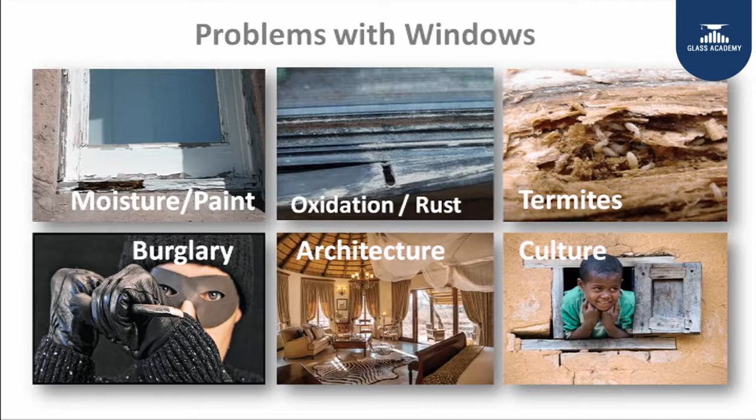Now, when you are connected with the outside, there are certain functional behaviors of windows to be looked at, and of course we also need to understand certain issues related to windows. I am sure you are all aware about the windows in your homes and the problems associated with that. So what are the typical problems, whether it is wood windows, steel windows, or aluminum windows? The simplest is you have to paint it, there are termite issues, there is oxidation, there is rusting, and sometimes beyond these you also have dust ingress, water ingress, noise ingress into the system.

So let us look back and see what windows do for us. If you open up the window, probably you get fresh air. Of course you do not have fresh air anymore in the ambience, but still you are allowed to have that. It gives an aesthetic to the house. It is one of the signature styles used by many architects.

And beyond these three functional requirements, nowadays there are three more critical performance parameters added to windows. The first is energy saving. If you are aware about energy saving, appliances now have a rating from the Bureau of Energy Efficiency as a star rating. A similar concept in windows is also coming in, wherein you have a performance rating.

Other than this, you have low maintenance. You do not want your windows to be repainted every 2 or 3 years. You do not want to replace the glass or the gasket or the performance of the windows. And the last is about sound insulation. People living in cities are now having a terrible time with increased traffic on the roads, trucks screeching throughout the night, and therefore windows do have a performance to insulate your house from sound as well.

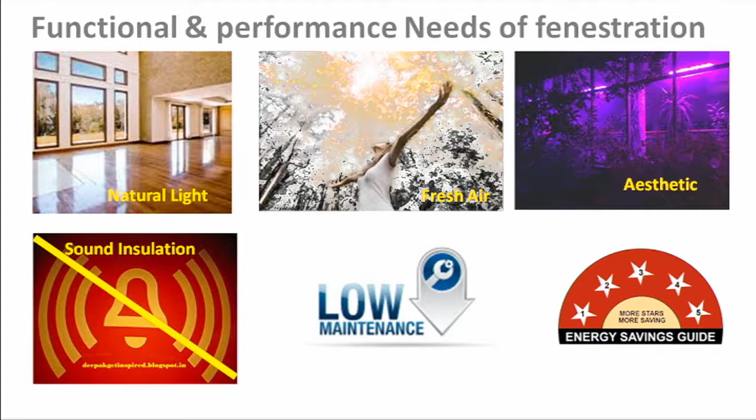So in short, we talked about window performances, functional performances, the need for these windows in today's context, and the problems associated with windows. Now in the next couple of sessions we are going to detail out how these performances are established in windows. Before we do that, let us take a quick snapshot of current statistics on three extreme areas.

One is energy, the second is air quality, and third is sound level. This data is already available on the internet, I am just reproducing it for your reference. One of the most polluted cities in India, if you look at the PM 2.5 level, is Delhi, followed by Lucknow and so on. Even if you look at the world standard given, we are much beyond that, and that is one big worry, how this is going to be controlled.

The second biggest challenge is sound. We talked about this as one of the performance parameters nowadays. Last year there were a couple of articles in the newspaper talking about how sound is becoming a new big nuisance in our life. The third and most important is about energy. If you look at the energy demand in the next 20 to 30 years, it is going to increase almost 132%.

And therefore, windows do have a role to play in all these three areas. As we move on this presentation, we will cover these also in our presentation.

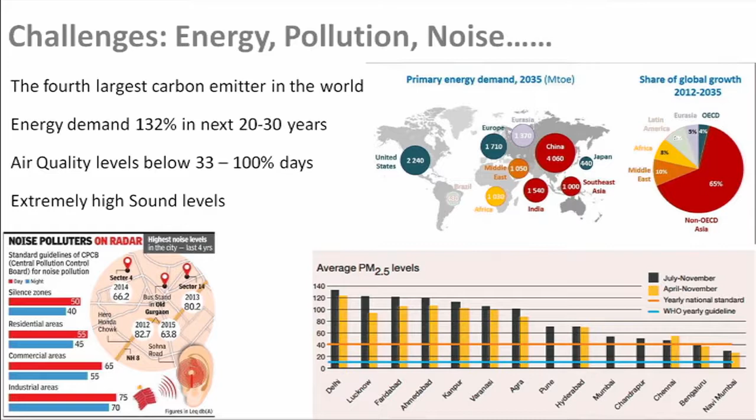Since we are talking about windows, let me also reiterate that in India, green building is one of the biggest things happening in the building and construction industry. A lot of builders are following green norms. It is a voluntary process, and happy to share, if you look at the data which exists, India probably in the next 10 years is going to be one of the largest green building footprints in the world. So that is something which is good for all of us.

But what is green building all about? It is not painting the walls in green. It is about you and me. It is about how the building is designed to take care of the nature and the people who are going to live in that building.

India's ancient buildings speak of a civilization that believed in a spiritual connect with nature. Its forts, palaces and houses were built in harmony with nature, and very often with limited wastage of resources. Over the last century, as buildings reached higher into the sky, they became symbols of modernity and progress. But somewhere along the way, buildings also became detrimental for the Earth's climate.

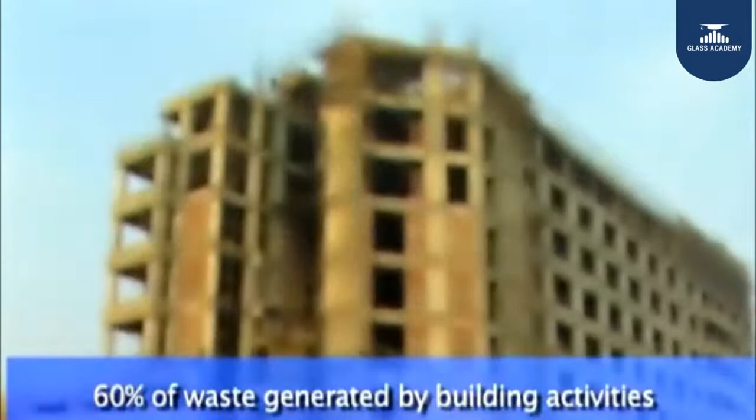Today, 40% of energy-related global emissions are attributed to buildings. 60% of waste comes from buildings or related activities. But on a smarter planet, buildings can be designed differently. Buildings that harness nature, buildings that need less energy, buildings that breathe. If you choose your building to be a perfect griha, this is where it begins.

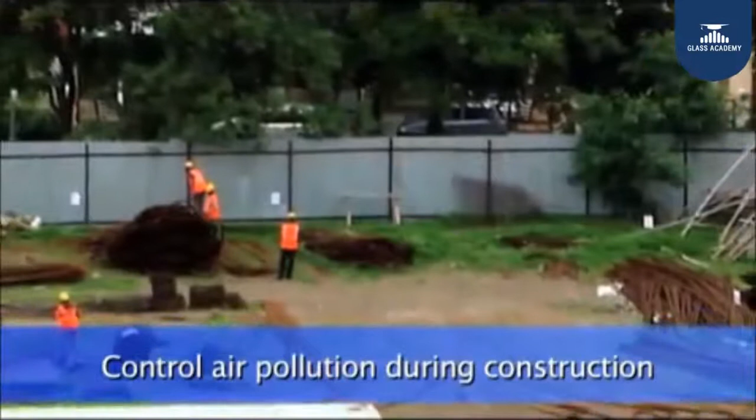Your site planning must conform to the master plan of the region. You must preserve agricultural land or protected land and trees on the site. The topsoil should be carefully separated, preserved and reused for landscaping once the building is complete. During construction, you must regulate air pollution. For example, barricades can help stop the dust from spreading into the surrounding areas.

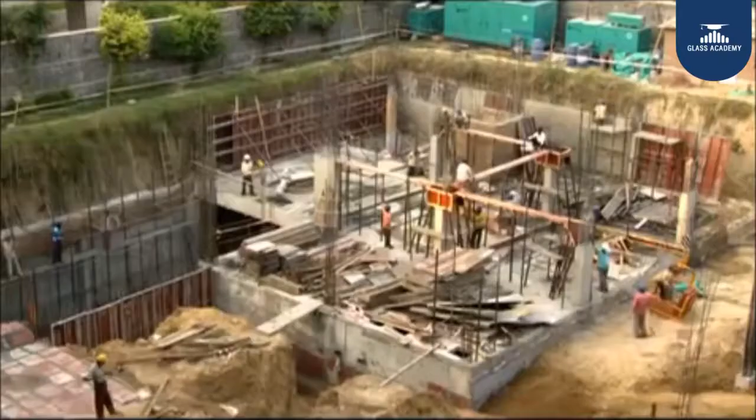Your building can use a variety of environment-friendly materials with high recycled content. During construction, you must ensure safety and sanitation standards for your workforce. Your building can have pervious or grass paving to allow rainwater to percolate. You may also build a provision for rainwater harvesting, thereby reducing the building's total water requirement.

All external lights of your building can have automatic controls and can be powered by solar energy. You can plant as many native plant and tree species in place of water-guzzling lawns. You can have efficient plumbing systems and sensors to minimize wastage of water.

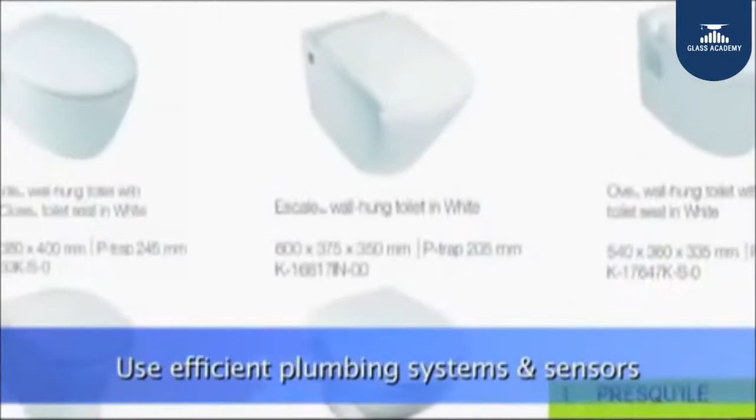In a hot climate, griha buildings are designed to allow minimum heat to enter the building. Smart shading techniques and controlled glass areas stop direct solar radiation into occupied spaces, but they ensure good diffused light inside the rooms, thereby minimizing the use of electrical lights during the day. The building energy systems, such as lighting and air conditioning, are designed to achieve high energy efficiency.

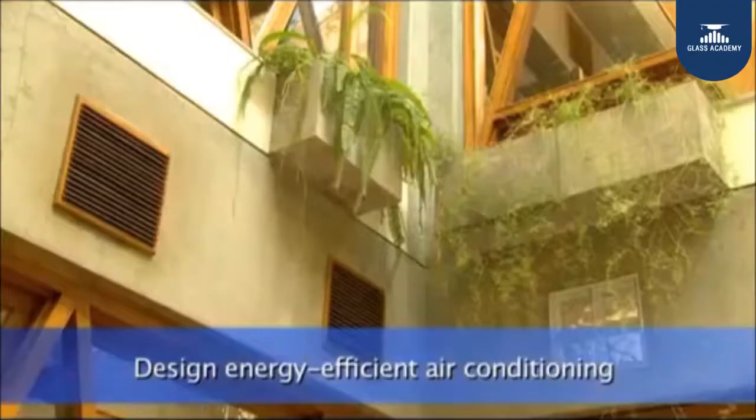While most upcoming developments rely heavily on generator sets, griha buildings meet a percentage of their internal energy demand with on-site renewable energy. In all, Griha aims to reduce, reuse, recycle and reinvent.

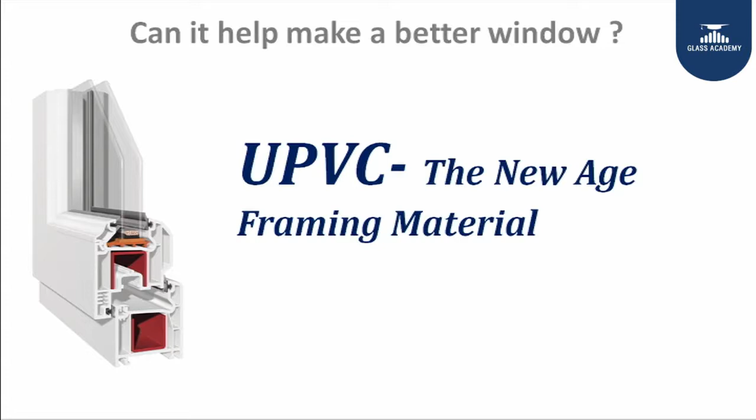Coming to materials in windows. Though we are primarily going to talk about UPVC, I am sure you are aware about other materials like wood, aluminium and steel. When we talk about UPVC, what does UPVC stand for? It's unplasticized polyvinyl chloride. That's the full form of it.

Before we dive into UPVC, let me give a perspective about polymer, plastics. In plastics, we have various types - for example, polystyrene, ABS, PET, polyethylene, PP, HDPE, nylon and so on and so forth. And out of this, there is one ingredient which we call as PVC.

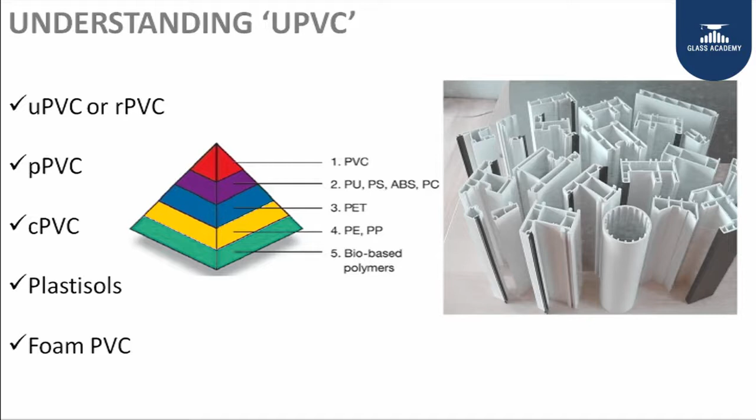PVC is one of the most versatile polymers which I have seen in the plastic arena. And I would like to give you certain examples on a demonstration, maybe after this presentation, on why PVC has been selected as one of the most preferred materials for the building and construction industry.

PVC, if you talk about it, can actually be converted into different forms, shapes and properties. PVC can be as soft as sponge and it can be as hard as wood. This change in properties is achieved because of the various ingredients which you put into the PVC, and they basically determine the properties or the behavior of the polymer. So let me give you some examples of PVC usage.

Sustainability means accepting economic, ecological and social responsibility. It means not wasting energy, looking into the future, providing future generations with a life of health. Sustainability means a clean environment.

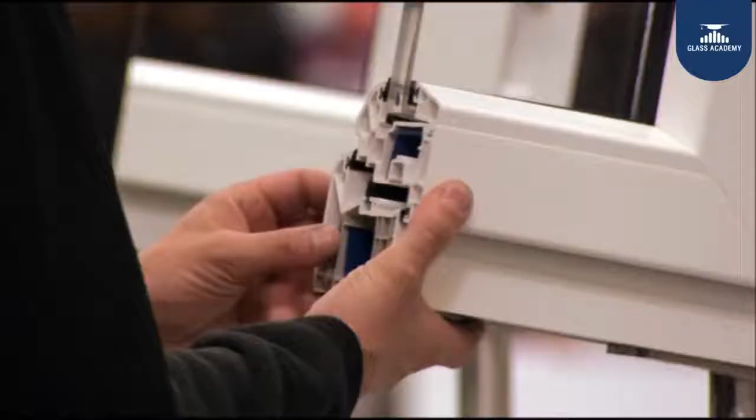Modern PVCU windows, with their energy-saving properties, boast an outstanding life cycle assessment from their production to their final full recycling. One key ecological and economic advantage of PVCU windows is their excellent recyclability.

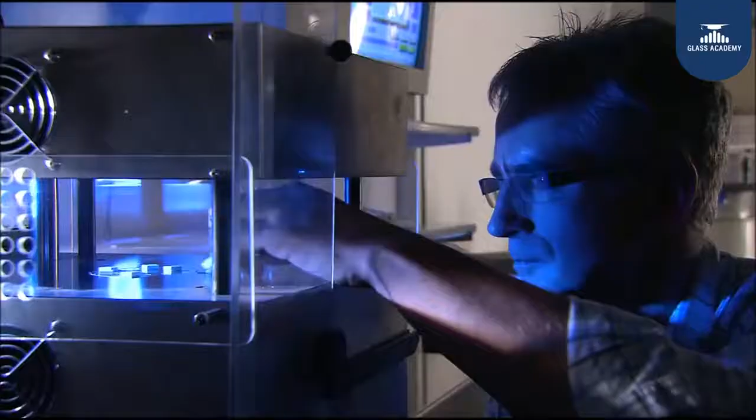PVCU windows can be fully recycled. This means that all of the raw materials they contain can be used again, a fundamental requirement for genuine sustainability.

PVCU windows are true all-round talents for the most diverse applications. Not only their sustainability, but also their antibacterial and antifungal properties make them the ideal choice for hospitals, old people's homes, schools and nurseries.

Opting for PVCU windows not only promotes sustainability, it also opens the way into the future. PVCU windows, with a clear conscience.

It can be used as pipes for conveying water, even potable drinking water. Windows, of course, it is being used. It can be used in soles. It can be used in furniture. It is used widely in the medical industry as blood bags, urine bags, tubings and so on. So, PVC is one of the most versatile materials we have seen, used in various types of applications, including building and construction.

Now you may say plastic is bad. We all know that, and this is the buzzword going around. Let me ask this question to all of you: how much plastic do you use on a daily basis in your life? You will be amazed to see the amount of plastic you use is phenomenal.

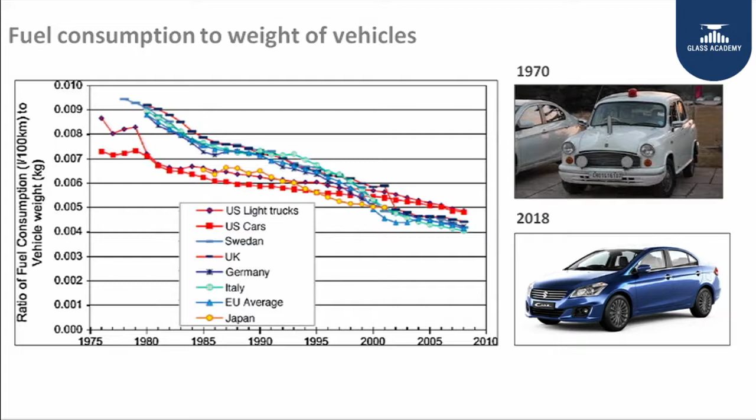So if it is used in the right way, I think it makes a lot of sense. At the same time, we need to have a mechanism to recycle this material through proper segregation and collection systems, which I think most of the US and European countries do have. In India, we do lack this. Let's connect back to our window industry.

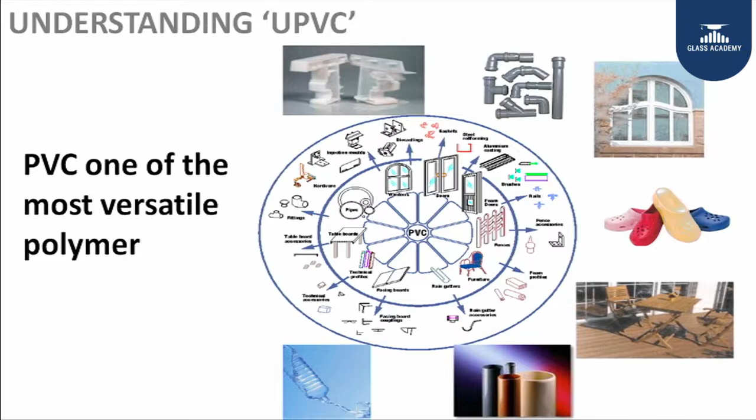UPVC is also a plastic, but my dear friend, UPVC was started in the 1960s by Germans, and in Europe this is seeing the second or third life cycle of that product, which means these windows are taken out from the installations and reprocessed. If you can recycle a product 2, 3, 4 times, I think the natural impact we are talking about is eliminated.

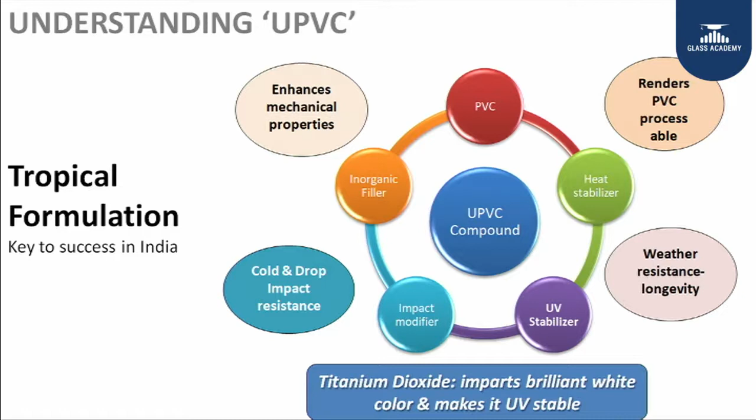So let's understand PVC a bit, because this is important to understand how this material can transform the construction industry. PVC, a polyvinyl chloride polymer, as alone cannot be processed. It requires certain additives like heat stabilizer, impact modifier, fillers, UV stabilizers and so on, to get different properties. If it is a plasticizer or soft PVC, you will also have a plasticizer. But in UPVC, we do not have plasticizer - it is unplasticized polyvinyl, which means there is no plasticizer in the system.

These ingredients are very critical to understand, and they are proprietary for many processors who extrude profiles. Why it is proprietary is because it imparts certain properties which you get by certain percentages. It's like a pinch of salt when you cook food - you don't put too much salt or turmeric into the system, you just put a pinch and it changes the entire flavor. Same is with PVC - these chemicals or additives are added in very small proportions, and they can enhance or have a detrimental effect on the entire formulation.

When we talk about PVC formulation, we need to remember that depending upon the country or region where you are going to use the plastic, it needs to be formulated to suit that place. For example, in Europe you have a very cold climate, it goes sometimes -10, -20, so to meet those expectations you need cold impact modifiers so the profile can sustain that type of impact. A place like India, which has high UV, needs UV stabilization to meet the needs of the country. Of course the temperature is not as severe as in cold countries, but here the temperature is on the other side, so the profile should be able to sustain on a continuous basis something around 45-50 degrees.

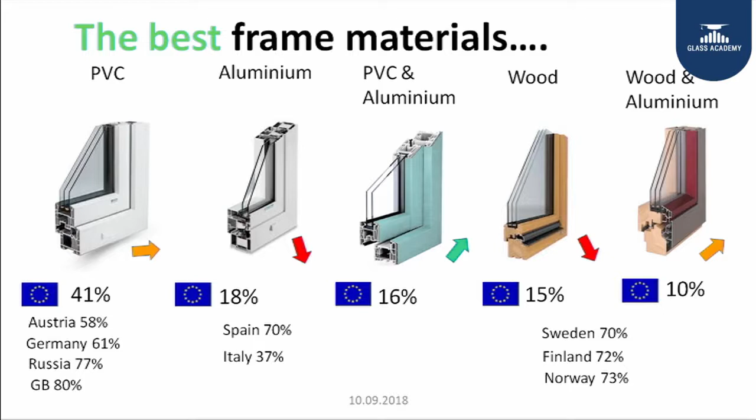But let me first complete the global perspective of PVC to give you a feel of how this product has been doing across the world. PVC as a frame material - Austria has 58%, Germany 61%, Russia 77%, Turkey almost around 90% PVC frame. As we move forward, we see places like US and China at 55% and 35%. In the last 15 years, India has only made 17% of the market share in the window industry. Looking at the trend in the global market, I presume this product will eventually catch up in India as well.

As I was talking about the benefits of UPVC, the inherent material characteristics give a lower U value or high insulation characteristics. It has enhanced insulation because of its chambers - multiple chambers from 2 chambers to 3 chambers, and it can go as high as 9 chambers.

The corners are welded, and therefore it does not allow any leakage from inside to outside from the corner joints. It has multi-point locking systems, which enhance the sealing in the entire window.

It can incorporate single, double and triple glasses in the same frame just by changing the bead, and therefore you can have better insulation using UPVC windows.

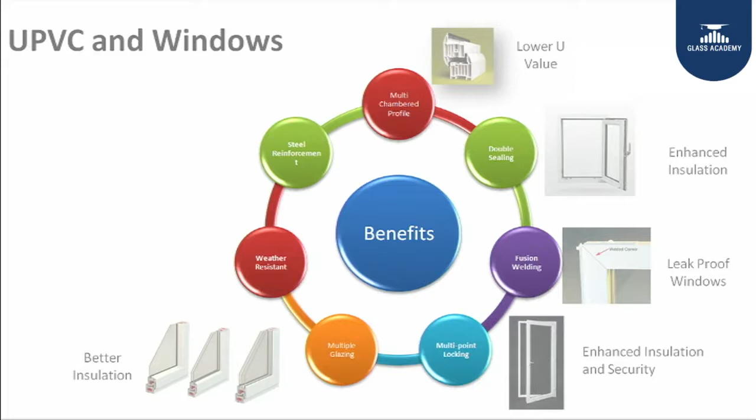Apart from this, the characteristics of PVC being a very versatile material means it does not require to be painted over a period of time. Its inherent UV resistance makes it work almost 20-30 years without any work on the surface of it.

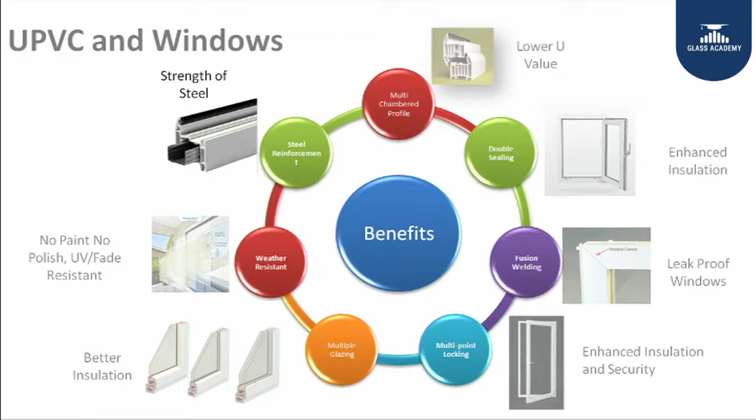And the strength is the last part, which comes from the steel inserted inside in an enclosed chamber, which is welded and sealed, so it is not exposed to any air or water to get it rusted.

So you get the strength of steel in a UPVC window and all the properties of PVC on the surface. So you don't have any paint requirement, you get termite resistance, low U value, good insulation characteristics, and multiple glass fitment in the same system.

So, to put it in a nutshell, I would like to run this video for you on why windows are important in our lives. As you know, windows connect you to the world and the natural environment around you. But today, I suggest not only looking through the window, but to start looking at the window itself.

Windows are a key component in buildings. They bring you light and comfort, but also natural ventilation when open. But windows also help make your buildings more energy efficient.

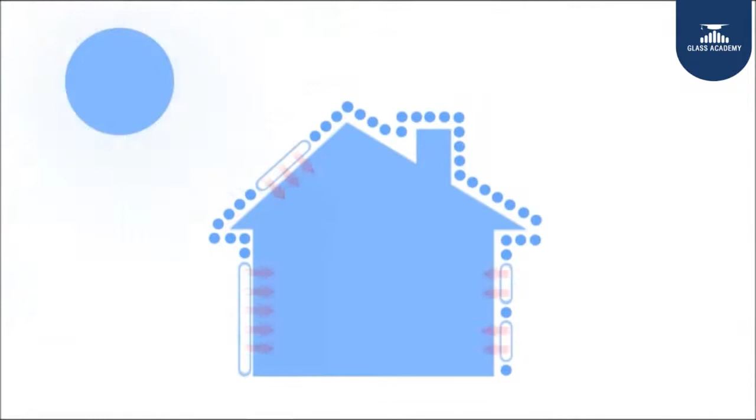They contribute to the insulation of a building, but thanks to the transparency of glass, they have the unique property to use solar heat and thus warm your house free of charge.

For this reason, the best performing window for your house depends on where you live, the climate, and your particular needs. If you live in Sweden, for example, maybe you'd like to have a window that keeps your house warm when it's cold outside. Well, a thermal insulating window with low emissivity properties, low E, is what you need.

It protects the comfort of your home, reflecting heat back into the room, and allows solar heat to pass and warm the interior when the sun is out.

However, if you live in Rome, you most likely want to keep your home temperate all year round. In this case, you need a different type of insulating glass, combining low emissivity with solar control properties.

Thanks to its insulating performance and its ability to reflect solar heat outside, your comfort will be improved. You will use less air conditioning and thus save energy.

Once properly equipped, your windows will help you save energy when both heating and cooling your home. Additionally, windows enable you to save electricity for lighting. More daylight inside will also improve comfort, productivity, health, and well-being for you and the people around you.

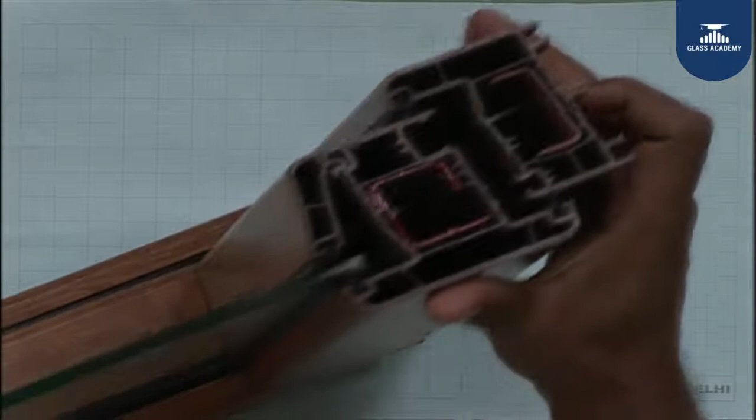There are 3 chambers and the center chamber is the steel chamber, and this is completely sealed in the welding process, so there is absolutely no air or water which can percolate into this chamber. Even the frame is with the steel section, the sash is with the steel, and the strength we are talking about comes from these steel sections. So this is one framing material we are talking about.

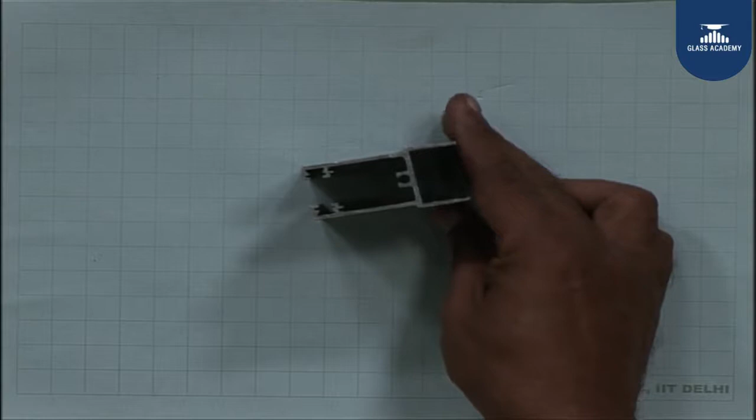When we talk about other framing materials like aluminum, we talked about non-thermal break. If you look here, this is completely aluminum from inside to outside, and this is a non-thermal break aluminum. You also have a thermal break aluminum.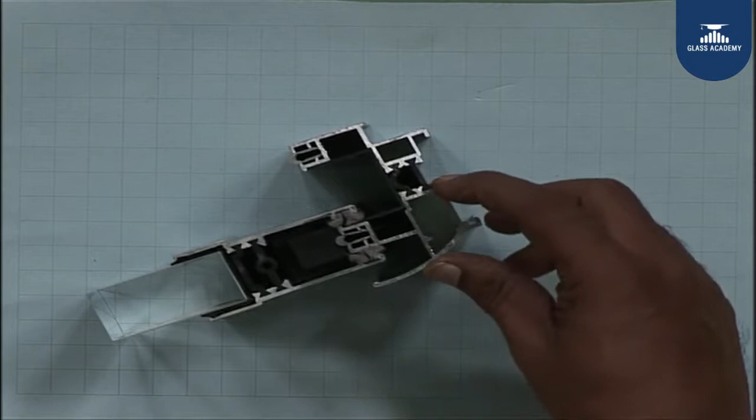If you look here, this is divided into 2 parts. This side is also aluminum, the other side is also aluminum, but between the two you have polyamide connecting the 2 parts, and therefore it stops the heat flow from inside to outside or from outside to inside. This is called thermal break aluminum, and this has a much better performance compared to non-thermal break with respect to heat, sound, and other insulation characteristics.